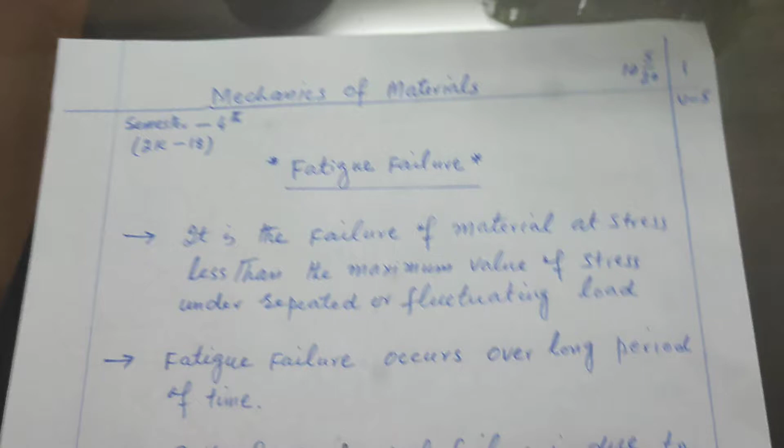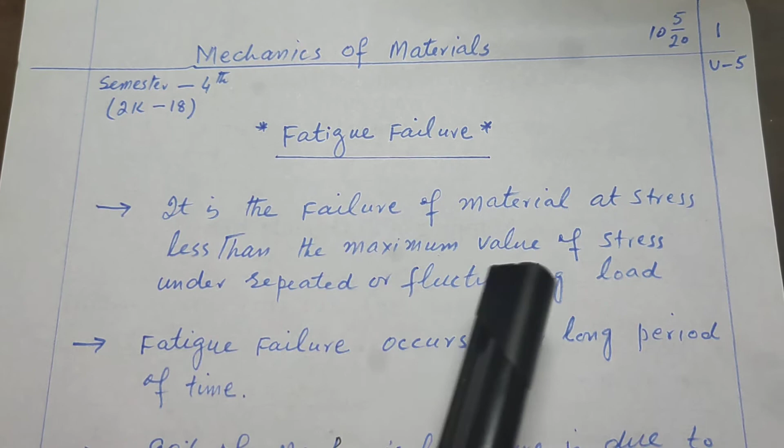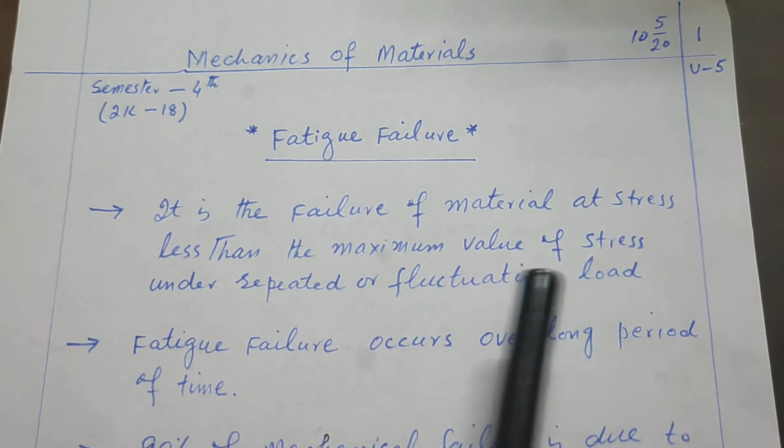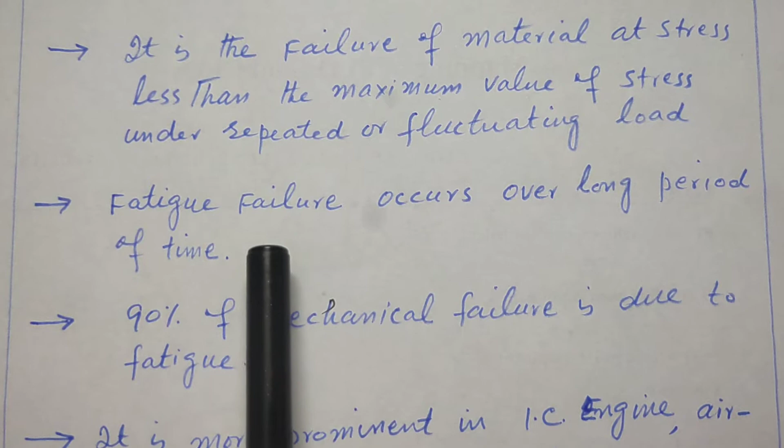First let's start with fatigue failure. What is fatigue failure? The definition is: it is the failure of material at stress less than the maximum value of stress under repeated or fluctuating load. Maximum value of stress means its value is less than the yield stress. Fatigue failure occurs over a long period of time, meaning the material fails after application of stress for a long period of time. 90% of mechanical failures are due to fatigue.

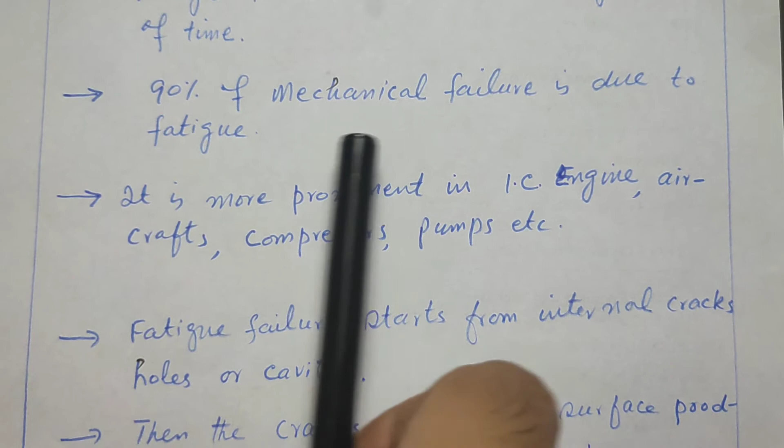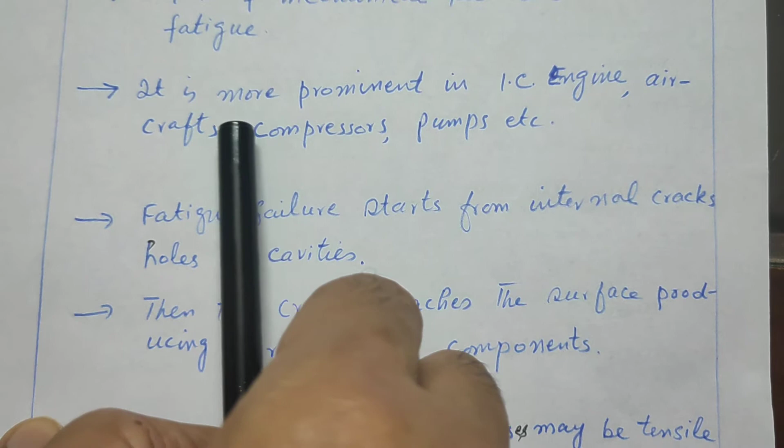It means the maximum component, structure or parts manufactured fail due to fatigue, and it is more prominent in IC engines, aircrafts, compressors, pumps, etc., due to the working of this equipment at high temperature.

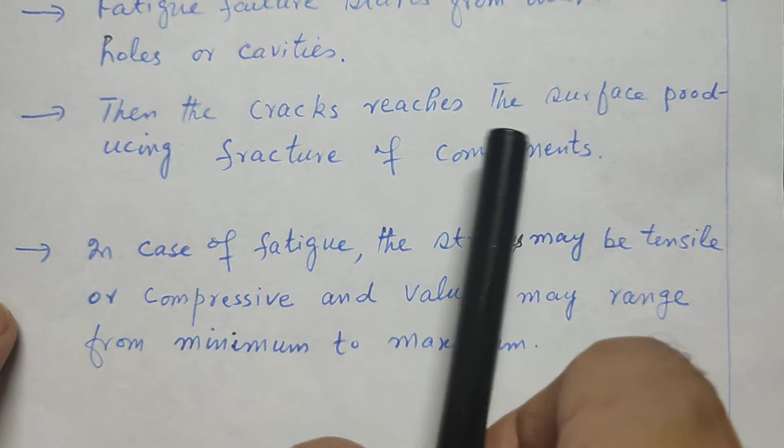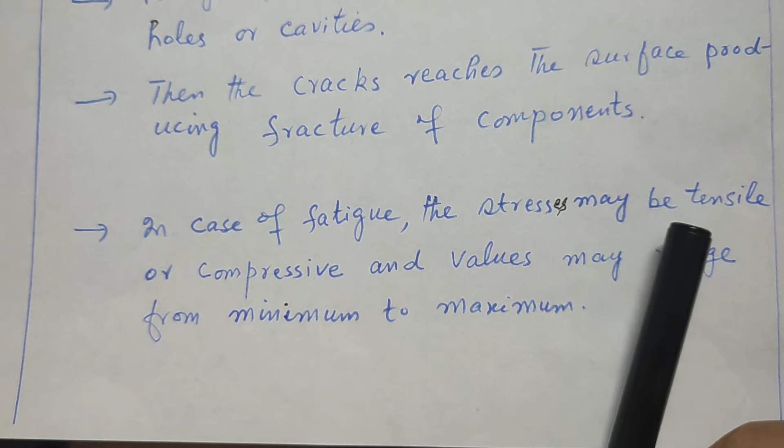The start of fatigue failure is due to internal cracks, holes or cavities, and then the cracks reach the surface, producing fracture of components. In case of fatigue, the stress may be tensile or compressive, and values may range from minimum to maximum. Example of this is here.

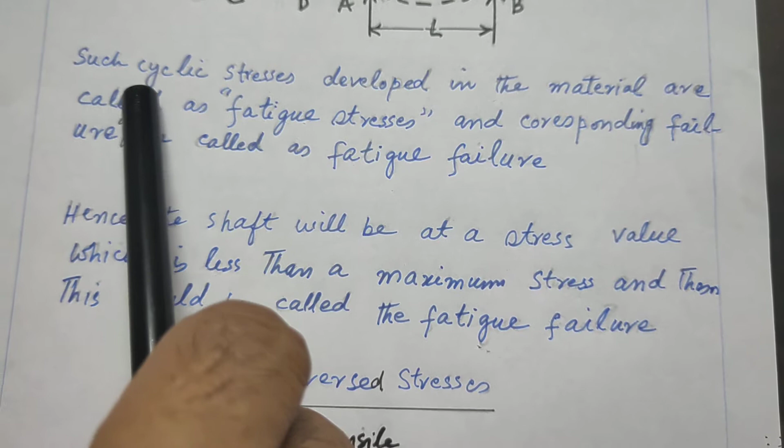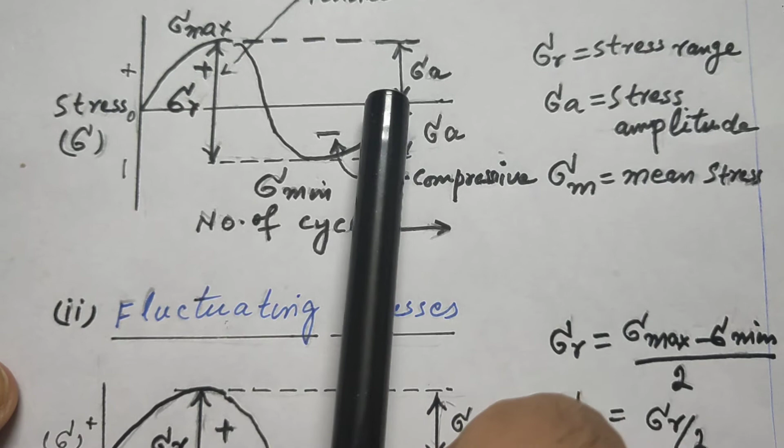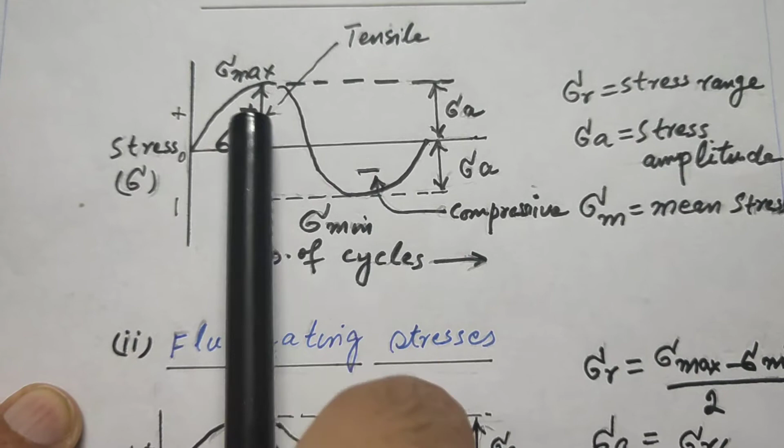In this case, the stresses are reversed stresses. The graph of these stresses: here on the x-axis, the number of cycles, and on y-axis stress value. This is sigma A stress, amplitude or alternate stress, and this alternate stress has a plus sign and this a minus sign. This is tensile and this is compressive.

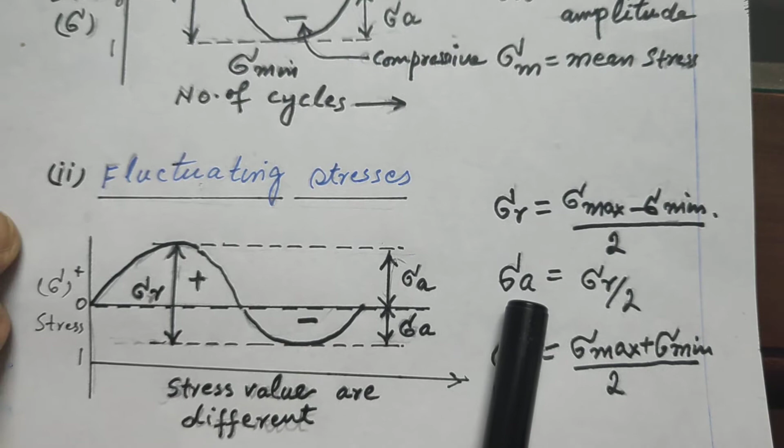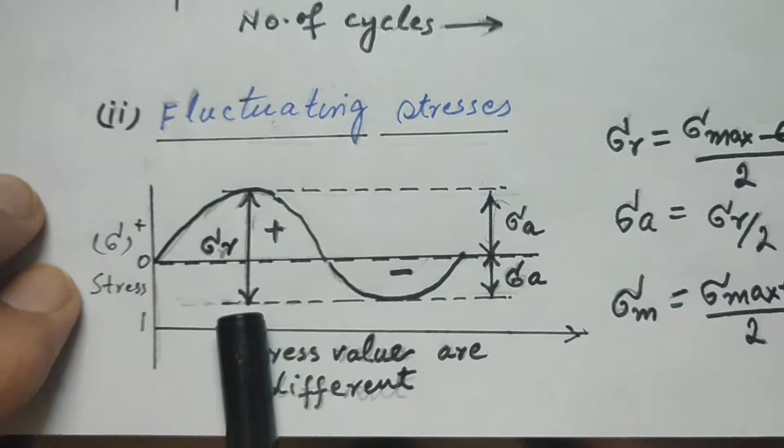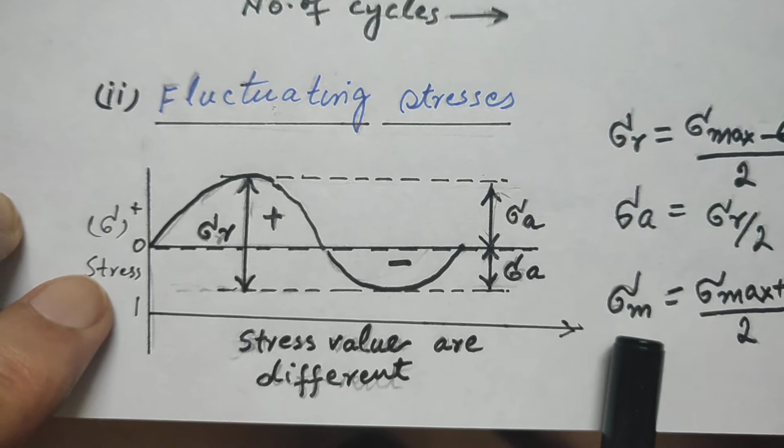Sigma R, the stress range, equals sigma maximum minus sigma minimum over 2, and sigma A, the alternate stress or amplitude of stress, equals sigma R over 2. For mean stress, in the case of fluctuating stresses, the values of stresses are not equal. We can see here this positive tensile stress value is greater than the compressive stress value. So stress values are different in this case of fluctuating stresses. Here we can calculate mean stress as sigma maximum plus sigma minimum over 2.

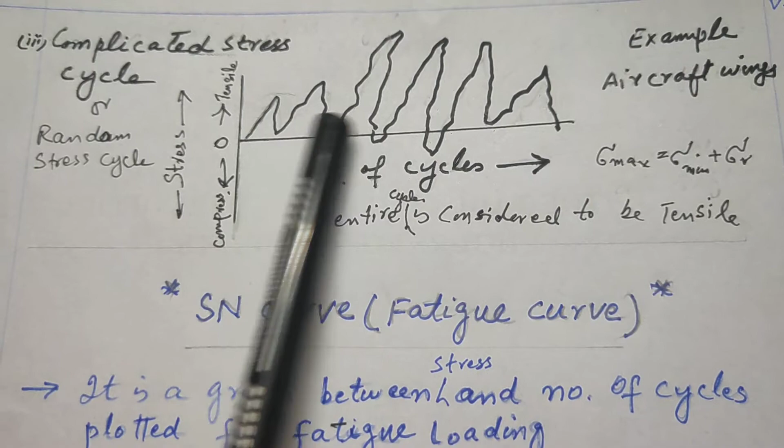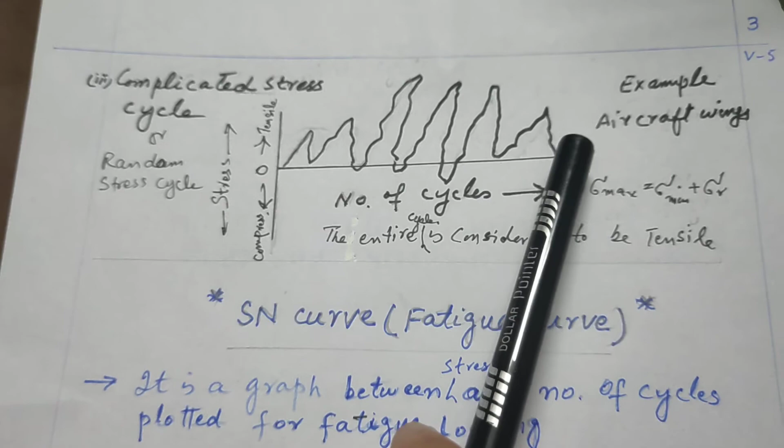The third type of stress cycle is the complicated stress cycle, also called random stress cycle. This entire cycle is considered to be tensile, and an example of this is aircraft wings, which are subjected to this type of cycle.

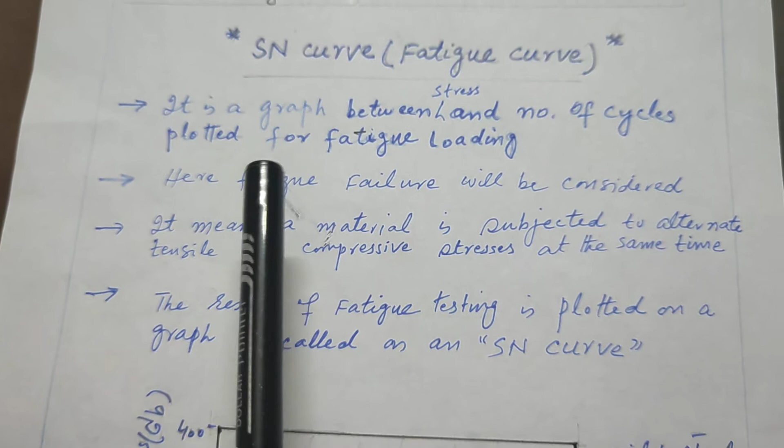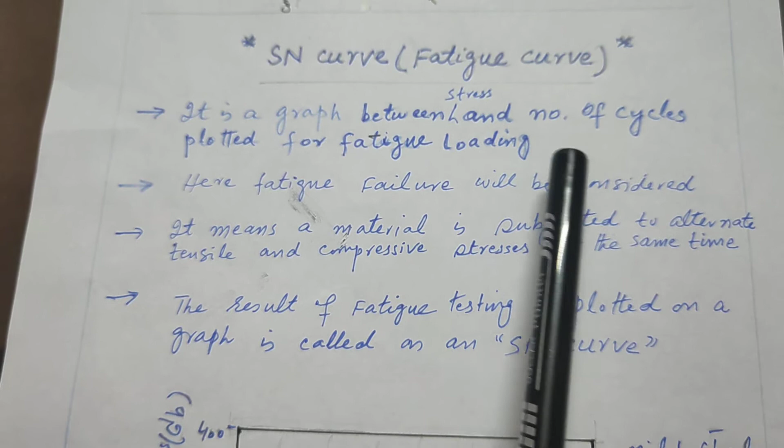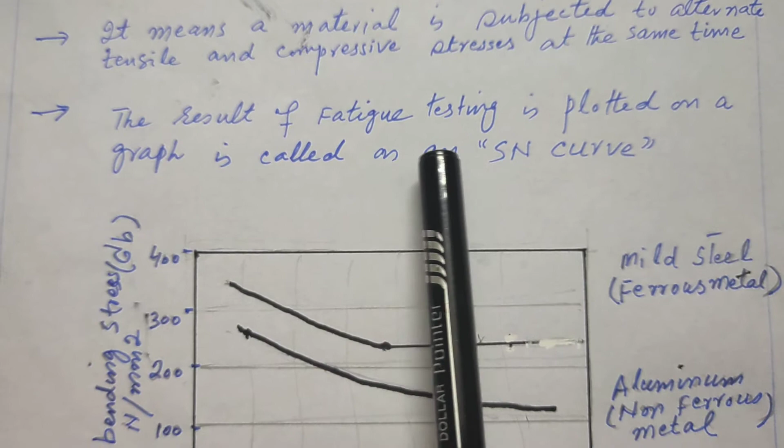Next, the SN curve - stress and number of cycles curve. In this case, the result of fatigue testing is plotted on a graph and called an SN curve. It is a graph between stress and number of cycles plotted for fatigue loading, meaning a material is subjected to alternate tensile and compressive stress at the same time, as we have already seen in the reverse cycle.

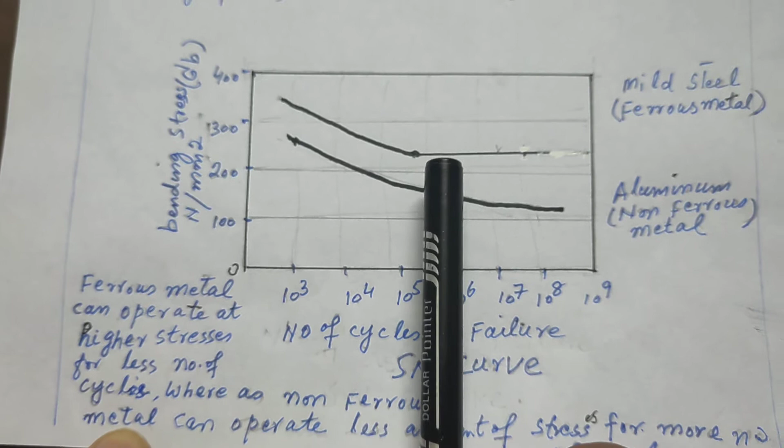Here there are two types of graphs: the graph for mild steel, ferrous metals, and this graph is for aluminum, non-ferrous metals. On this axis is bending stress sigma b in Newton per millimeter square, and on the x-axis, number of cycles to failure.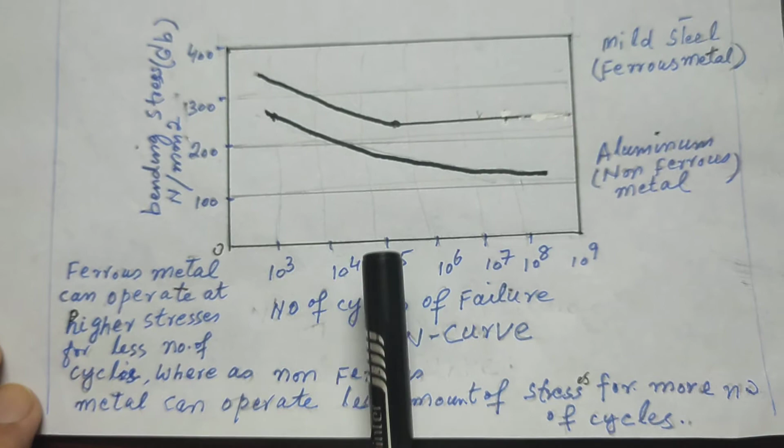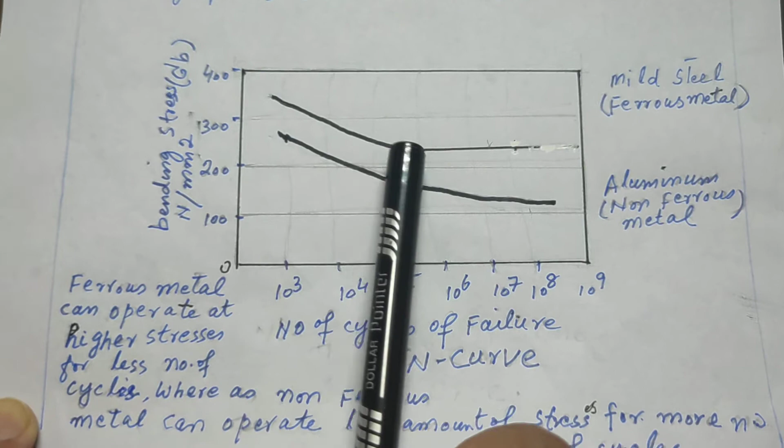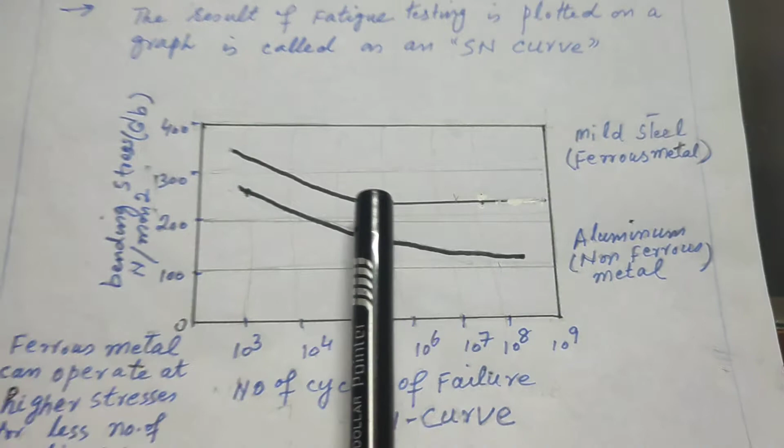So if we see this, in this case, if we decrease the stress, the number of cycles will increase. Decrease stress, number of cycles will increase. In this case also, if you decrease the stresses, number of cycles increase. But in mild steel's case, this point is the endurance limit or fatigue limit.

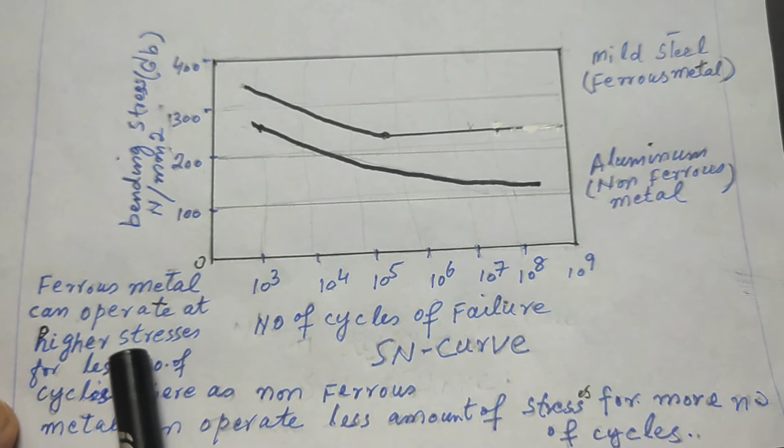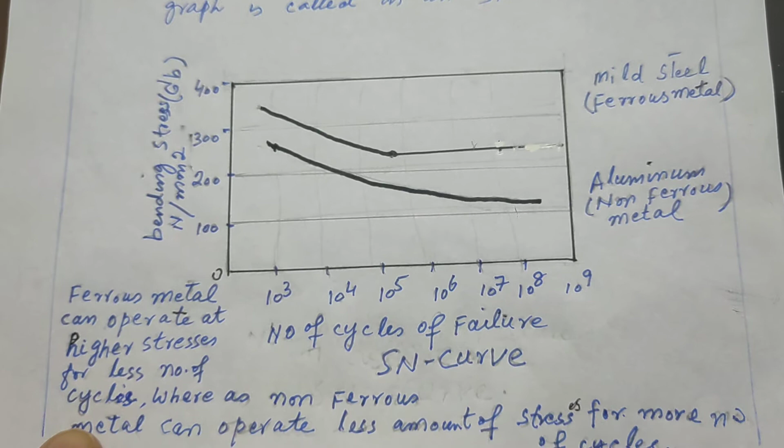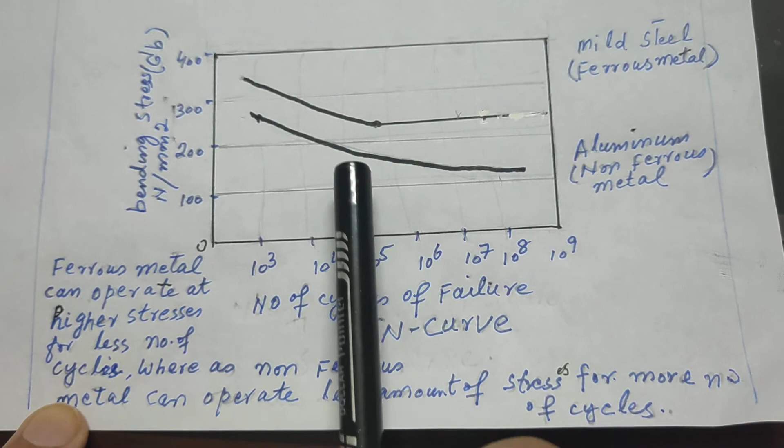So for these two curves, we can define: ferrous metal can operate at higher stress for fewer number of cycles, whereas non-ferrous metals can operate at less amount of stress for more number of cycles. The stress amount is less as compared to this, but number of cycles is more. Here the stress is higher and number of cycles is less, as compared to aluminum or non-ferrous metals.

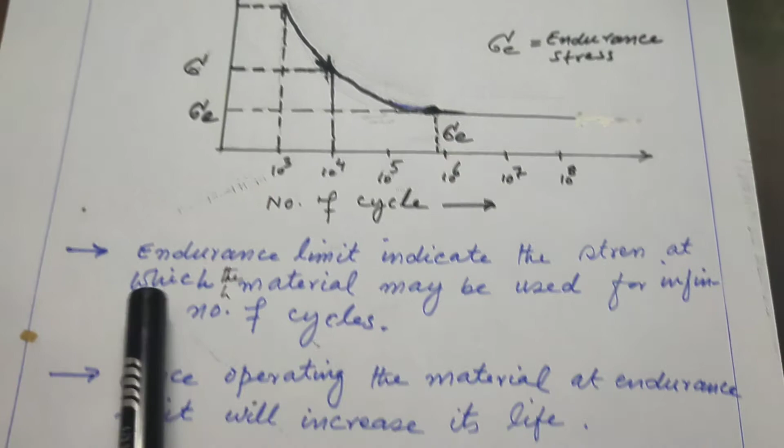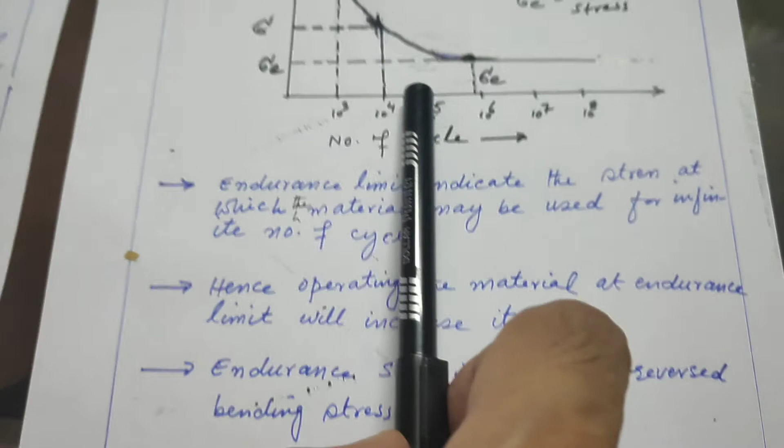So we can define it as: hence operating the material at the endurance limit will increase its life.

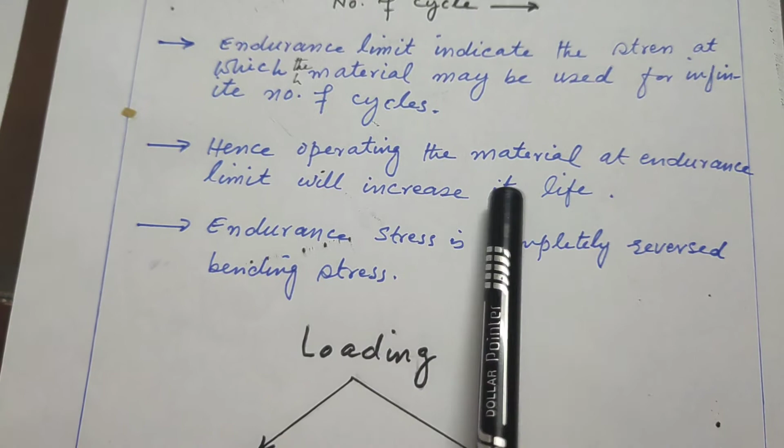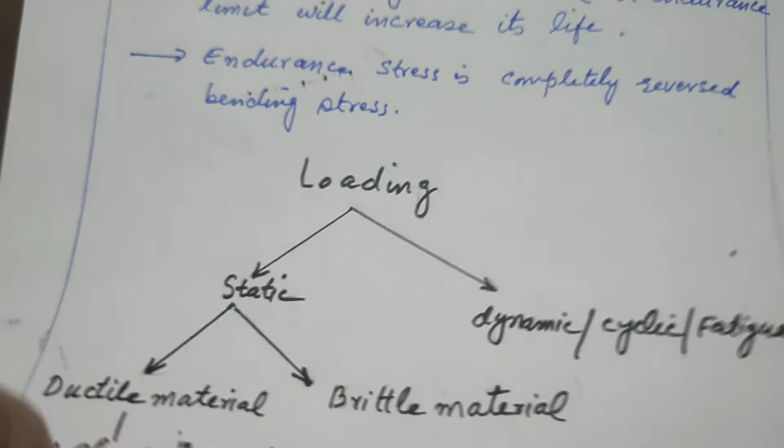This is a type of loading, static loading and cyclic loading, as explained in this diagram.

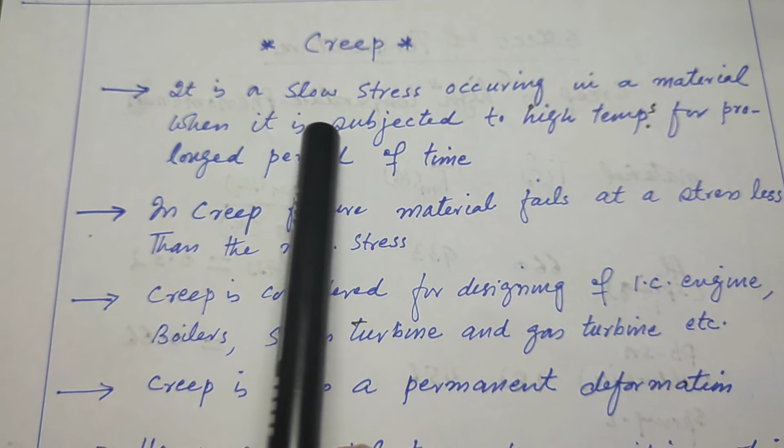The next topic is creep. The definition of creep is: it is a slow strain occurring in a material when it is subjected to high temperature for a prolonged period of time.

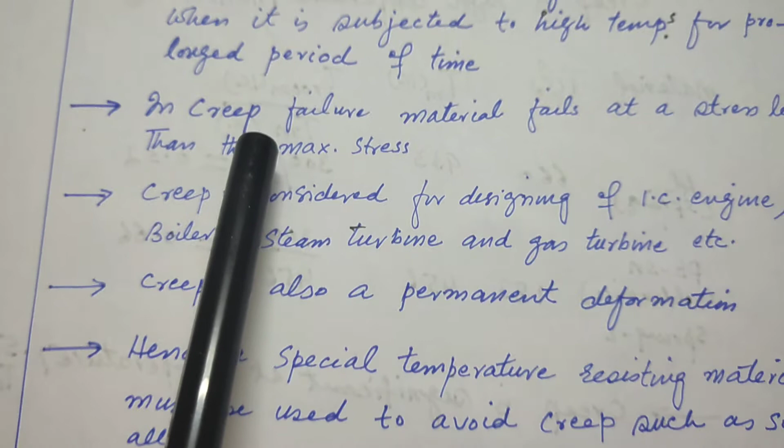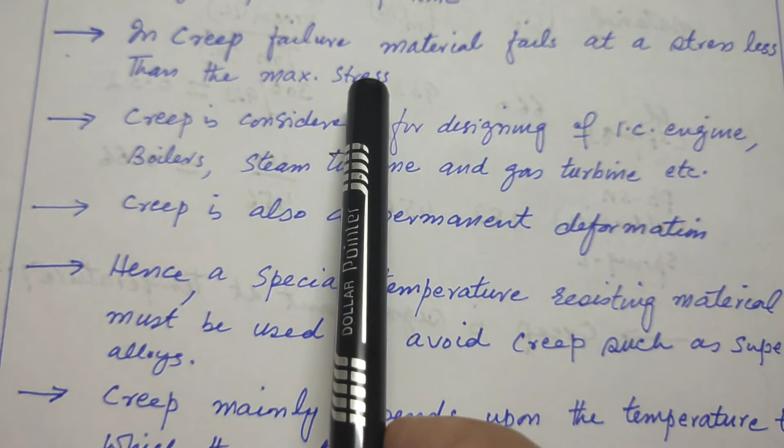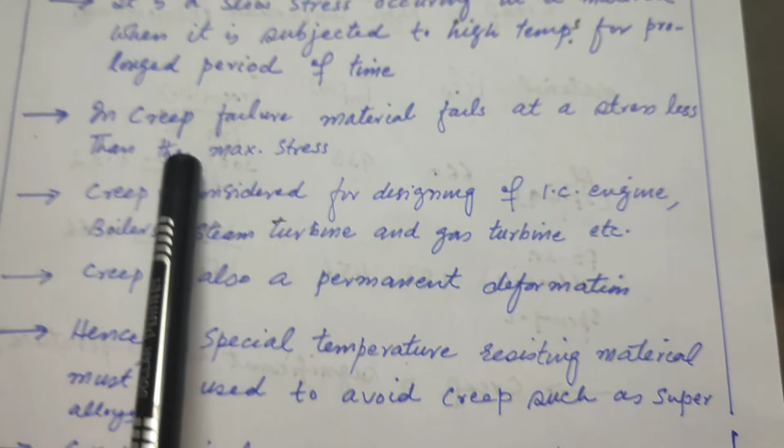It means the strain is due to high temperature or prolonged period of time. It means it is temperature dependent and also time dependent. In creep, the material strains at a stress less than the maximum stress, meaning the creep strain occurs at a point compared to the yield stress that is at less stress than the yield stress.

Creep is considered for designing IC engines, boilers, steam turbines, gas turbines, etc.

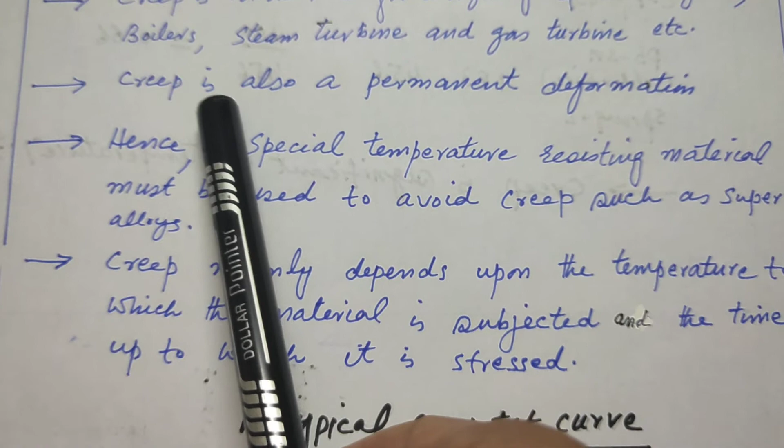Creep is also a permanent deformation, meaning that once deformed, it cannot return to its original position; it is permanently deformed.

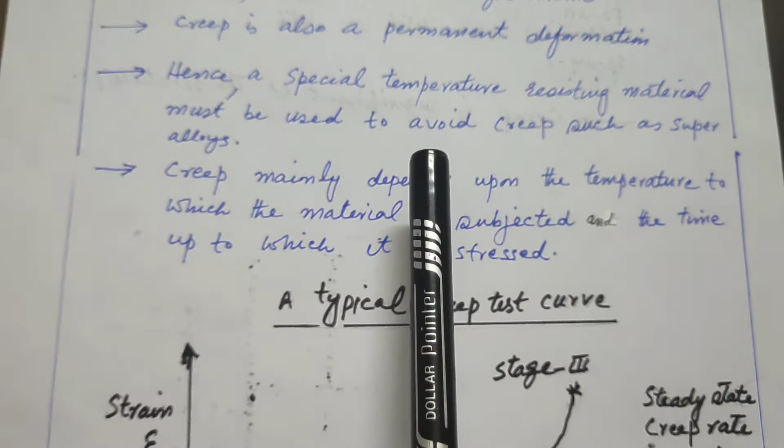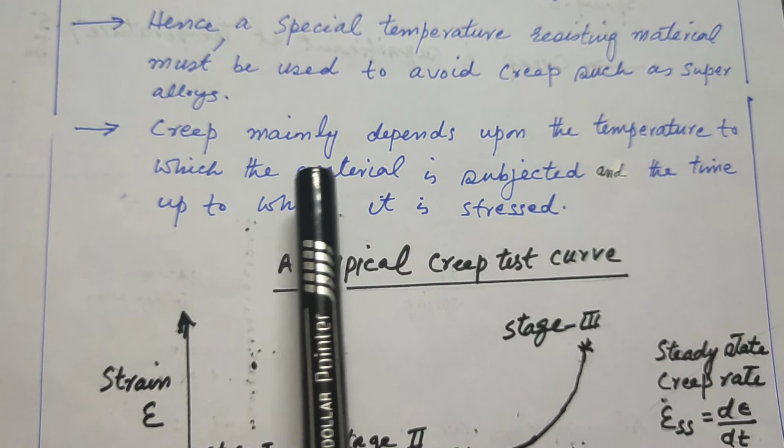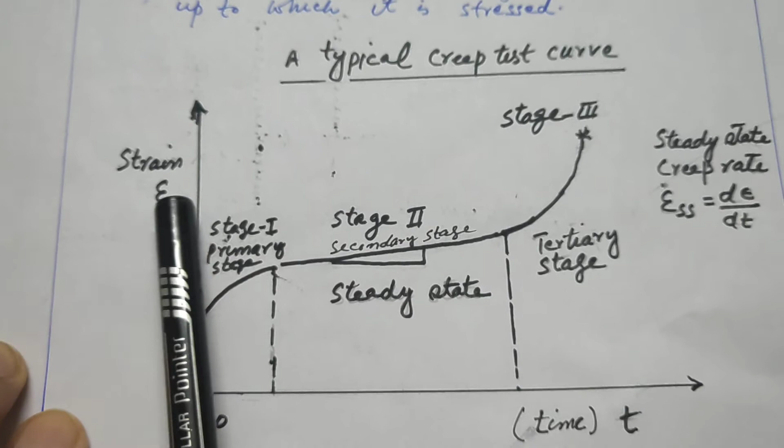Creep mainly depends upon the temperature to which the material is subjected and the time up to which it is stressed. Here is a typical creep test shown, which is a curve between strain and time, strain as a function of time.

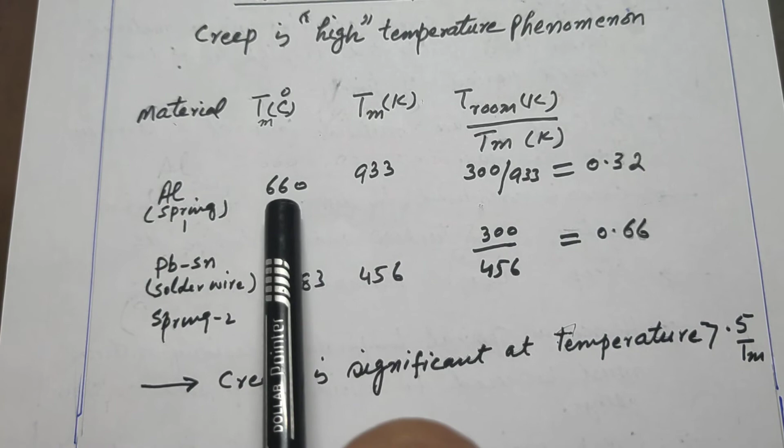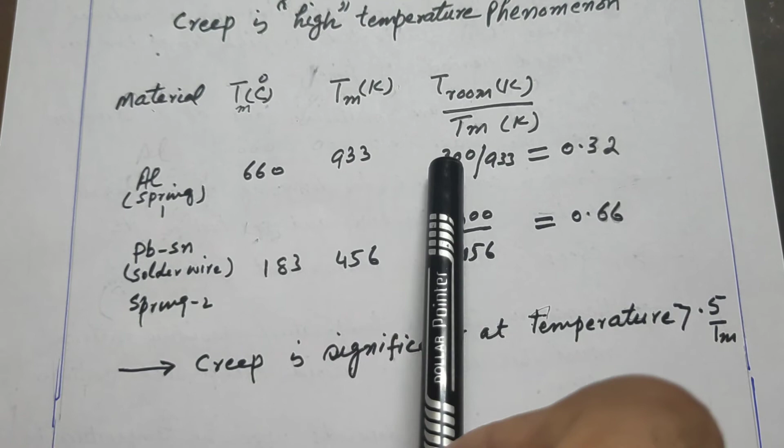300 is room temperature divided by 933, the ratio will be 0.32. And in case of the second spring, the melting temperature is 183 degrees centigrade.

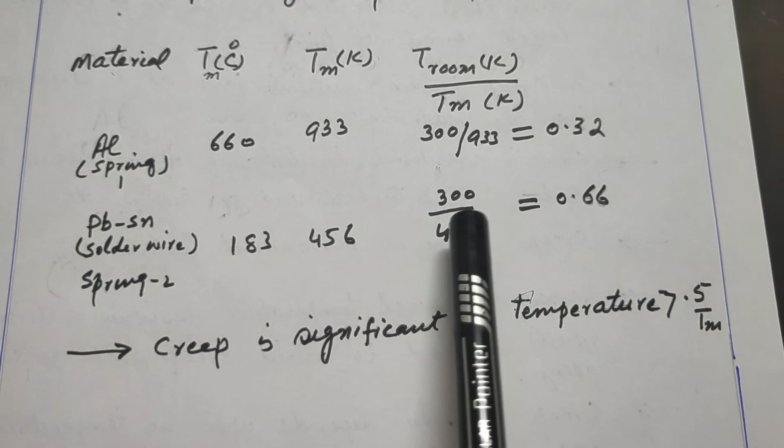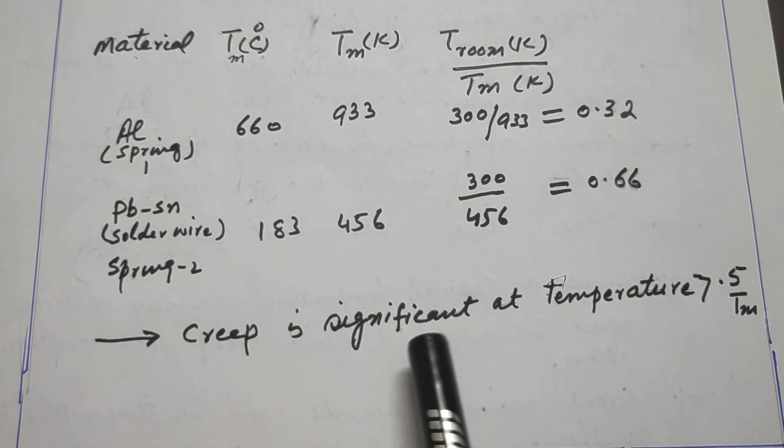If we convert it into Kelvin, this value will be 456, and the ratio between the room temperature and the melting temperature is 0.66. So here we can see creep is significant at temperatures greater than 0.5 of the melting temperature. So with 0.66 in this second case, the creep will be higher as compared to the aluminum case.